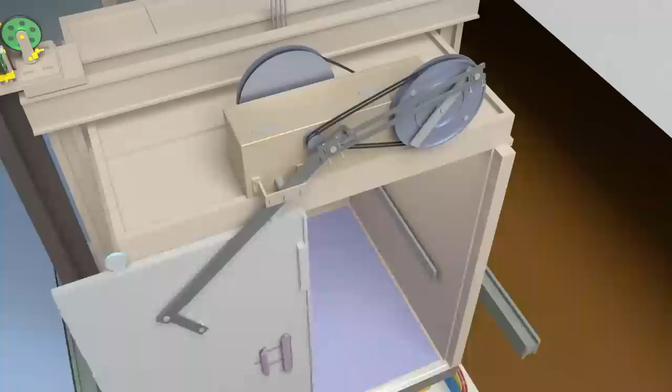Elevators revolutionize the way we build and live in our cities. In this video, we'll be exploring the different parts of an elevator, how it works, and then the safety mechanisms which protect us as we ride these amazing machines.

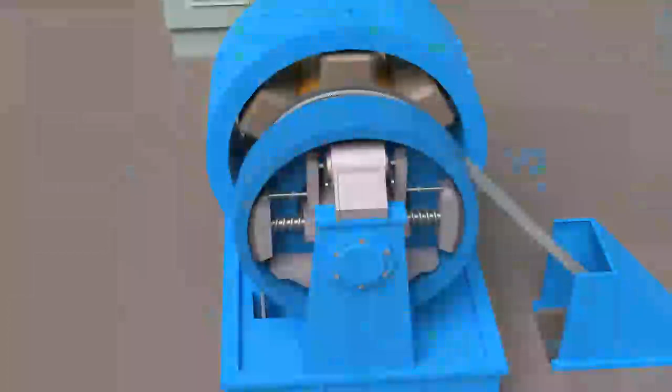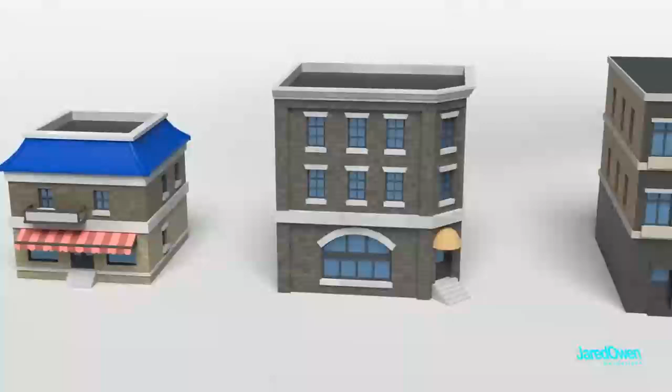In the 1800s, architects and engineers were pushing the boundaries of how high we could build. As these buildings increased in height, there was somewhat of a limit. It was hard to utilize the upper floors because you had to walk up a lot of stairs, and no one really wanted to do that every day. The reason we started to build higher is because of elevators. In many parts of the world, it is referred to as a lift, but in this video, I'll use the word elevator.

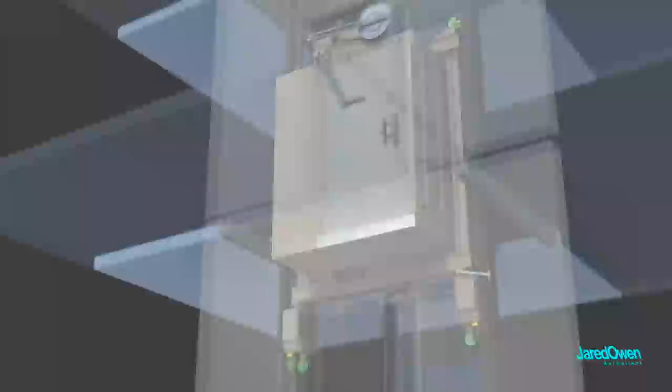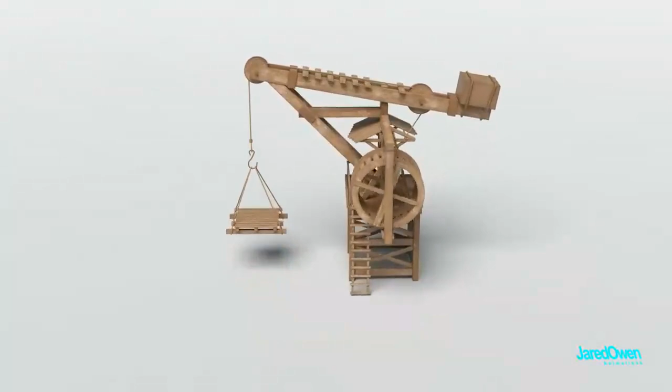The elevator is not a recent invention. The idea of using a machine to lift things in the air, this is not a new idea. It can be traced back to ancient civilizations over 2,000 years ago. Various lifting devices such as hoists or cranes, these have been used in various places like factories and construction sites. But lifting people, that usually wasn't done. If that rope snaps, there is nothing stopping you from falling to the ground. In the early 1850s, Elisha Otis invented a safety mechanism that changed everything. Let's take a look.

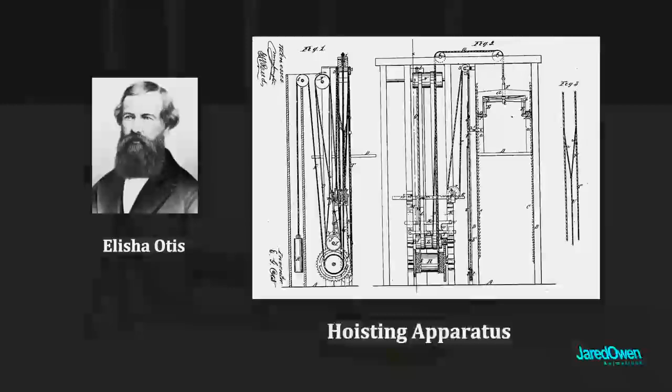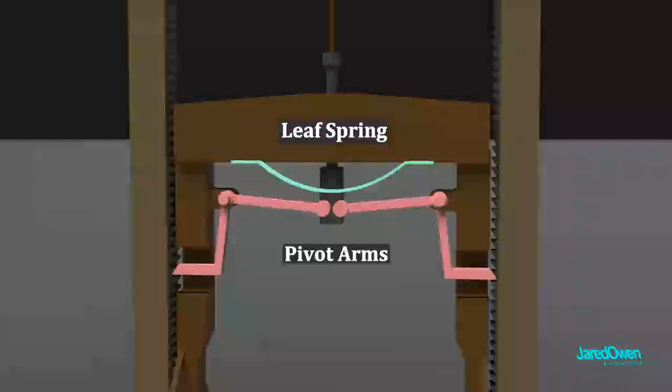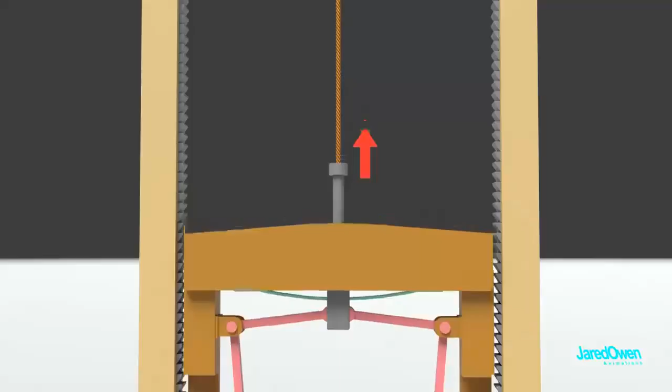This is a simple lift that can be raised or lowered by the rope. The safety mechanism is made up of a leaf spring, 2 pivot arms, and the teeth on both sides. When the lift is being pulled upward, the pivot arms are retracted, allowing the elevator to rise. But if the rope suddenly loses tension for any reason, the leaf spring immediately pushes the pivot arms down, which then come in contact with the metal teeth. This stops the elevator from falling to the ground.

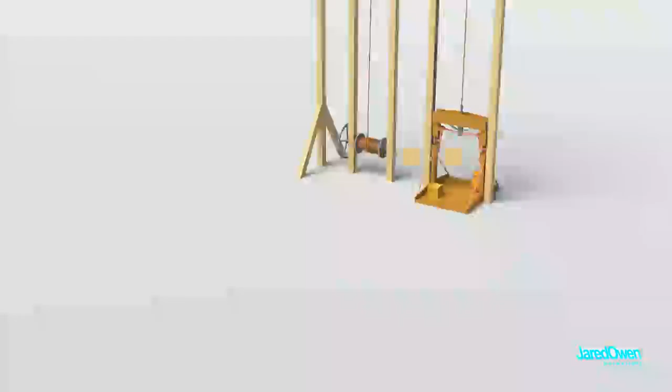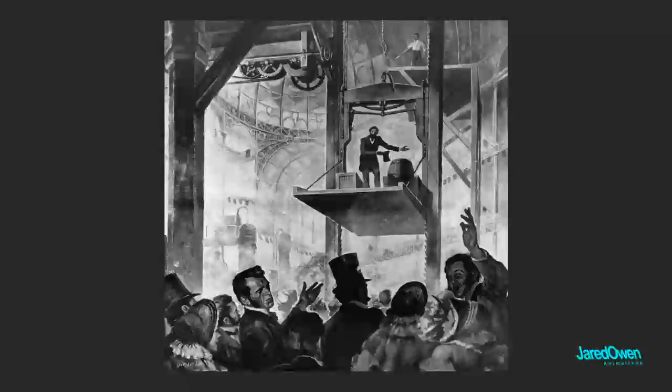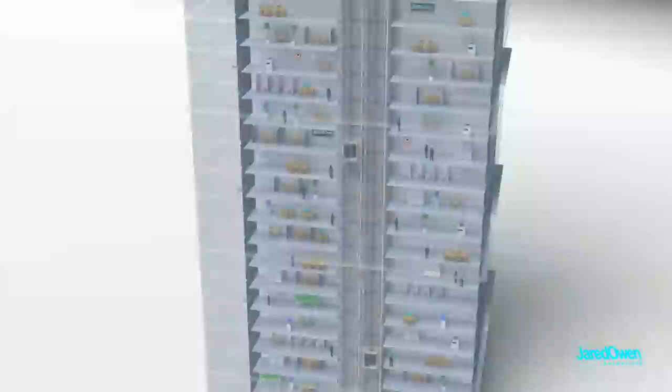Mr. Otis was so sure of his invention that he demonstrated it to a crowd of people at the World's Fair. He lifted himself up on the elevator and then had someone cut the supporting rope above. He only fell a few centimeters. This demonstration convinced the public that elevators could be safe enough for people to ride. Elevators today have multiple safety mechanisms in place, but it all started with Elisha Otis. Over the coming decades, elevator shafts became the core of most buildings. This allowed for skyscrapers to reach new heights and for the buildings to be fully utilized.

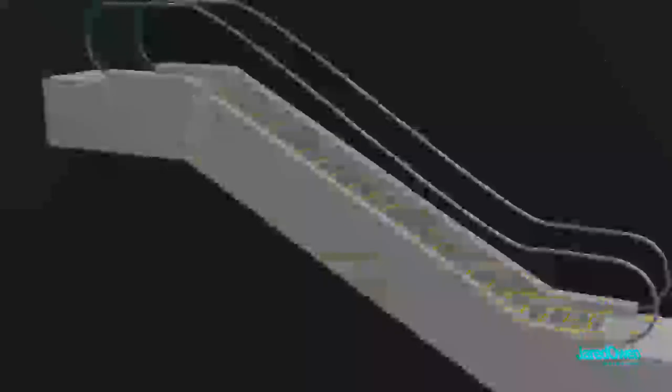And of course, we have to mention the revolving stairs, or more commonly known today, the escalator. Helpful for moving large amounts of people, but only up a few floors. Once those buildings get really tall, the best solution? The elevator.

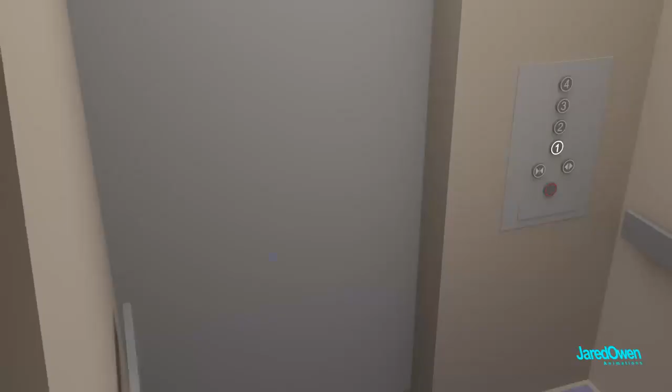Ah, that music. But for this video, we'll pick up the pace just a little bit.

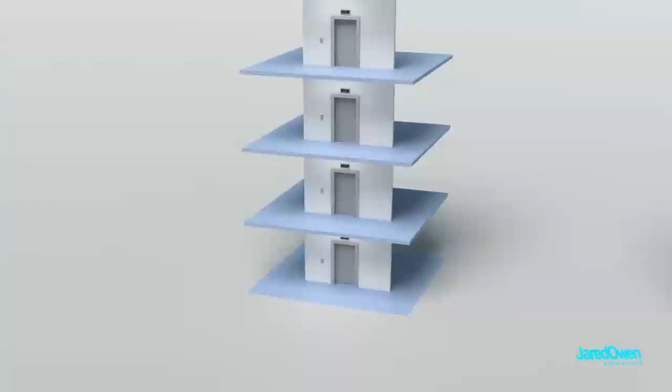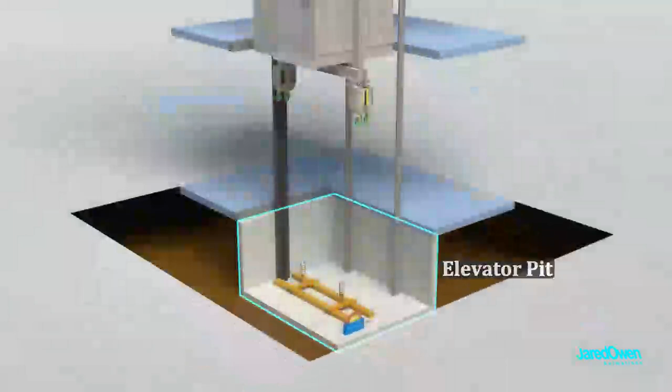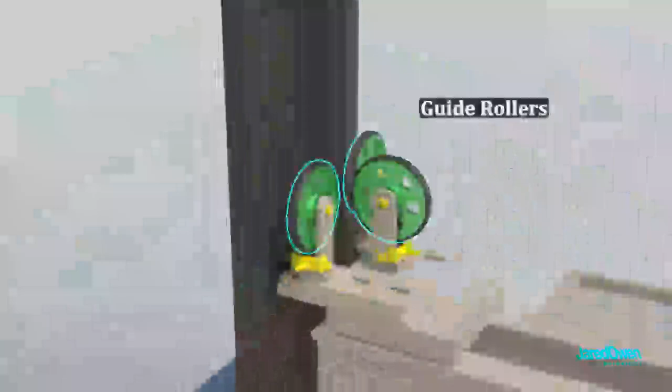Let's go over some basic parts of the elevator. Now, there's a lot of different elevator companies and different ways to make elevators. Some of the mechanisms and names will be slightly different depending on the elevator. So keep that in mind. This is called the shaft or the hoistway. The elevator pit at the very bottom. Then we have the cab, which moves up or down inside the shaft. And these are the guide rails. The cab usually has guide rollers to move it along the rails.

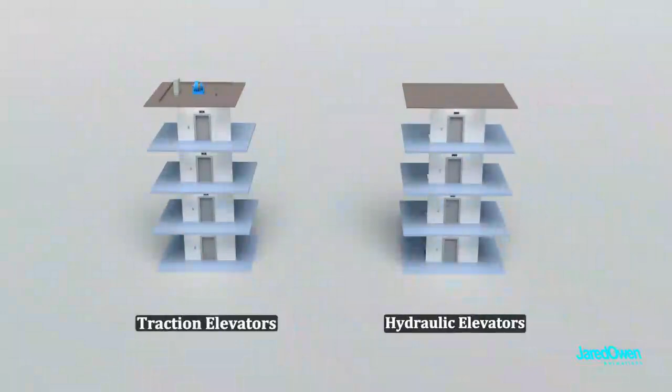There are 2 main types of elevators, hydraulic elevators and traction elevators. In real simple terms, traction elevators lift the cab from above using cables, and the hydraulic elevators push the cab up from underneath. For most of this video, we're going to look at traction elevators. These are the ones you'll find in really tall skyscrapers. But first, let's at least get the basics of the hydraulic elevator.

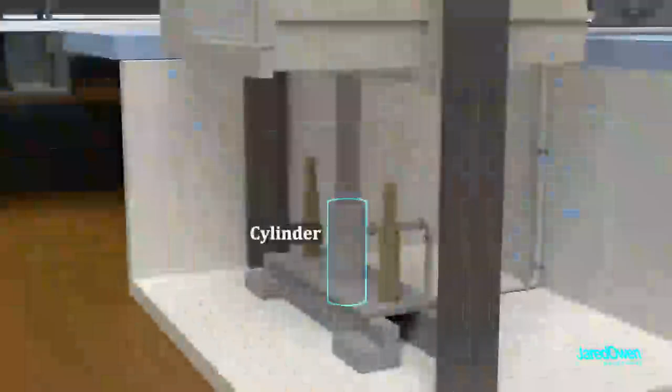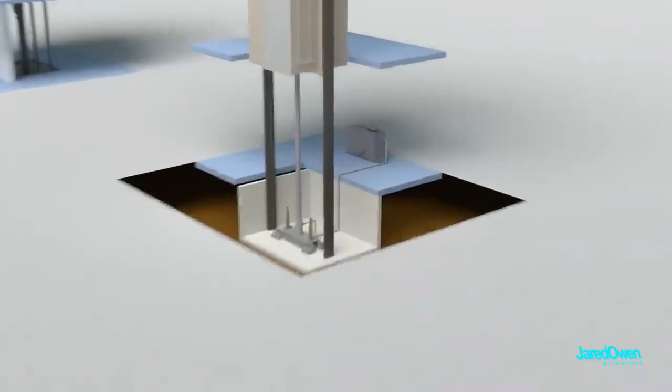This uses a cylinder and a piston. These usually extend several floors beneath the ground, so there's enough length to push the elevator up. Close by, you'll find a machine room with a pump unit filled with oil. When the elevator needs to go up, the oil is pumped through the pipes and into the cylinder. The pressure pushes the piston up, which raises the elevator into the air. You'll find hydraulic elevators in smaller buildings, usually not more than 6 stories tall. This is due to the length of the cylinder and the pressure involved to push the piston up.

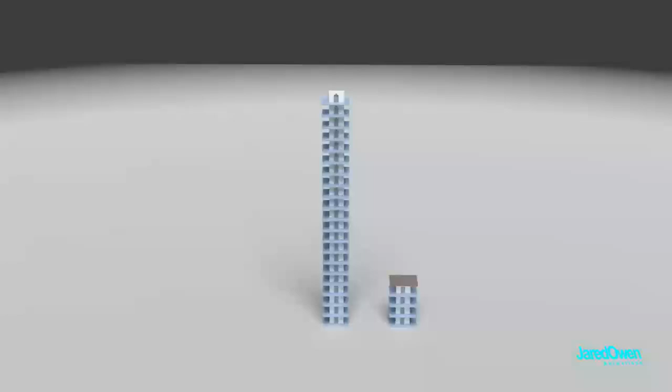Okay, traction elevators. Are you ready? Traction elevators are most common in taller buildings. In some places in the world, these elevators can service more than 100 floors. Let's not get too carried away though. I'm going to demonstrate this with just 4 floors. We'll keep things simple. At the very top is the machine room. This is where you'll find the electric motor.

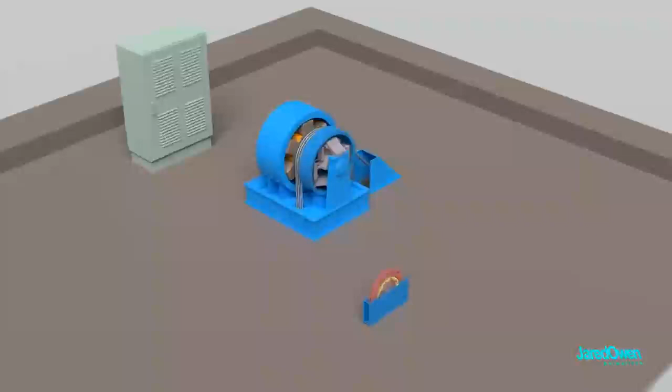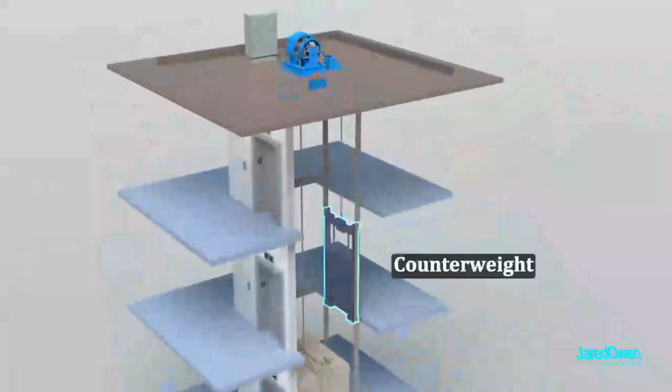The motor pulls the cables by turning the sheave, which is basically a special kind of pulley. On one side, the cables go down and attach to the cab, and on the other side, they attach to the counterweight. The counterweight moves opposite to the elevator cab. So why do we have this counterweight? Without the counterweight, the motor would have an enormous amount of tension on only one side. It would have to work a lot harder to lift or lower the cab.

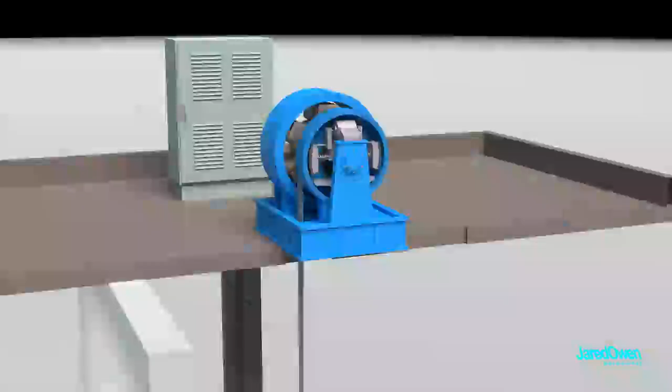The counterweight makes it so that there is less strain on the motor. All it has to do is tip the balance so the elevator moves up or down. The counterweight will weigh as much as the cab when it's about halfway filled up. Ideally, the system will work best if it's perfectly balanced, but this won't always be the case. The weight of the elevator cab will frequently change.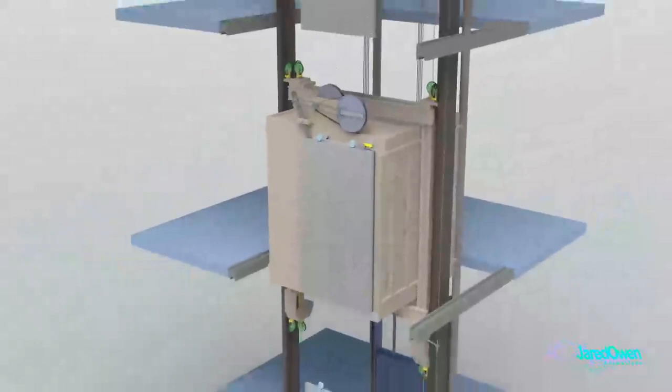This is the controller box. It's like the brains of the elevator, safely moving it up and down. Not all traction elevators are going to have a dedicated machine room. They're able to fit the motor and other components at the very top of the elevator shaft. They refer to this as a machine roomless elevator, or MRL. We won't go into detail about these, but I at least want to mention them so you know that they exist. Elevators have many safety features built in to protect the passengers riding in the cab.

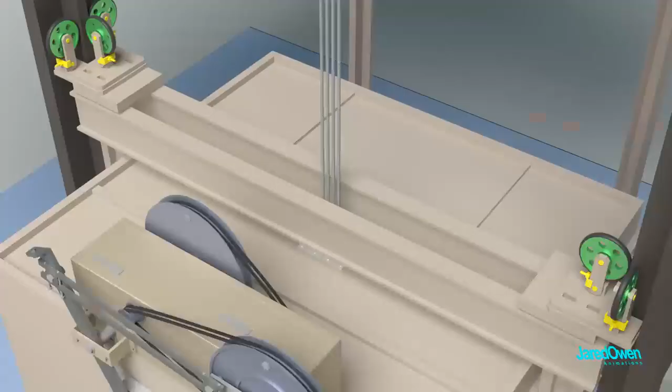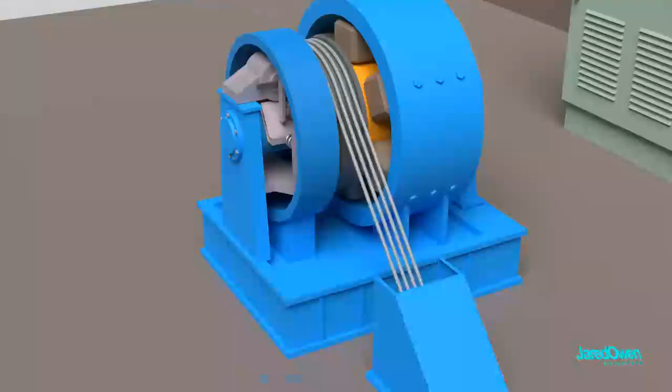First, you have the machine brake. This is used to stop the spinning of the motor and hold the cab steady. There are usually at least 4 cables holding up the cab, sometimes as many as 8 cables. Each of these cables is strong enough to hold the weight of a fully loaded elevator. The likelihood of all of these cables snapping is very small, but if it did happen, you would still be safe. Let me show you.

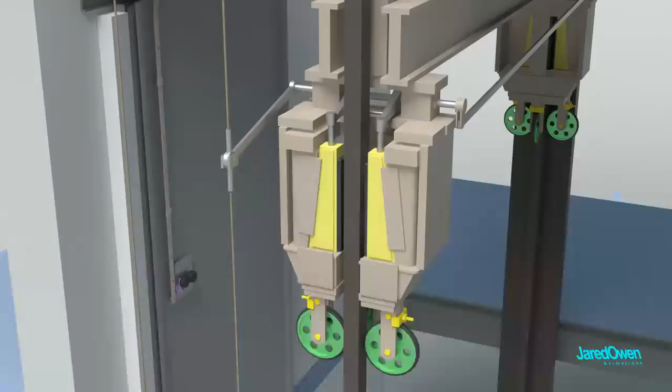Do you remember Mr. Otis's safety mechanism at the beginning of this video? The modern version of this is a little different, but the main idea is still the same. At the bottom of the elevator cab is the emergency brake. There are 2 clamps, and these are located on both sides of the guide rail. Normally they don't touch, so the elevator is allowed to move up and down. But if the lever is pulled, then they move in and grip the guide rail, which stops the elevator from falling. The lever is connected to a cable, and this is a separate cable from the ones that lift the cab. This cable attaches to another wheel at the top.

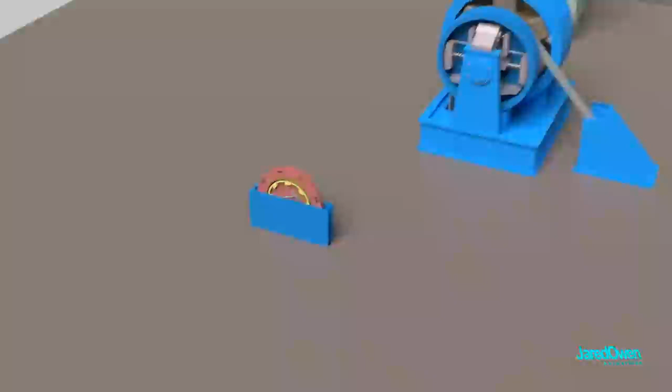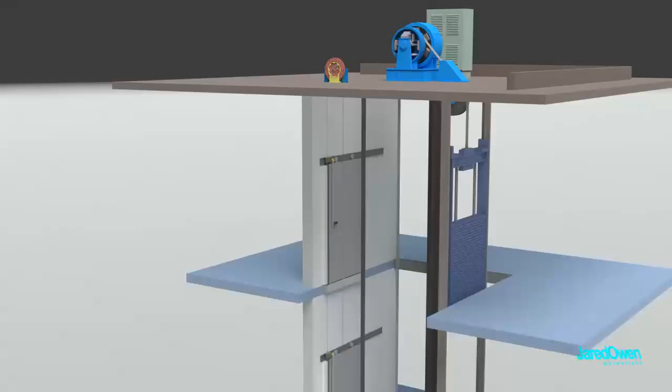Let's take a look. Back up here in the machine room, this device is called the overspeed governor. Normally, this spins along with the elevator cab as it moves up and down. Inside is a mechanism with 2 flyweights. Let's say, for whatever reason, that the cab starts to move downward too quickly. The overspeed governor will spin faster. If it spins too fast, these flyweights will move outward and catch the gear teeth on the side. This will stop the spinning, which stops the cable, and the weight of the cab now causes the lever to go up. And there's clamps on both sides of the elevator which firmly hold it in place.

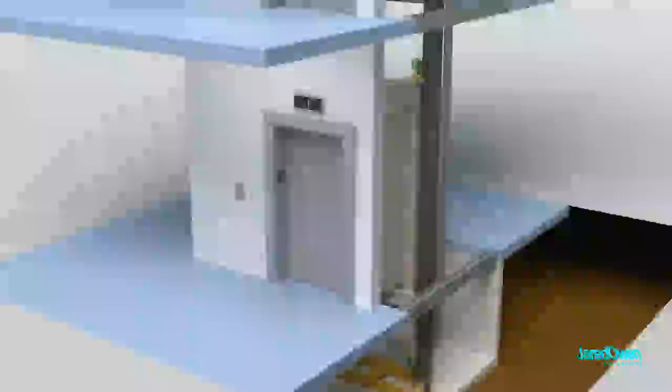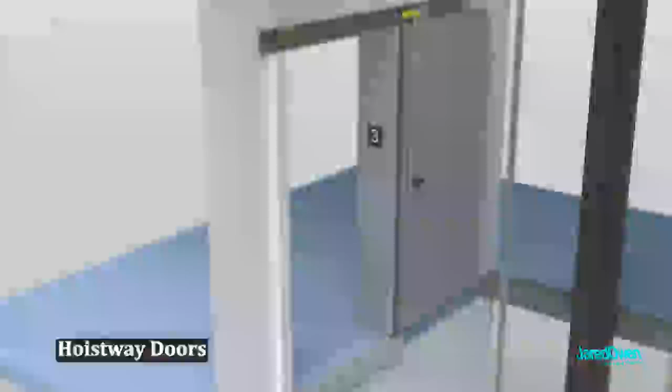Now, if you do happen to get stuck in an elevator, don't try and force the door and climb out. Press the emergency call button to get connected with someone who can send help. Let's talk about that door mechanism. There are essentially 2 doors on an elevator. On each floor, you'll find a door. These are usually called the hoistway doors. And then on the elevator cab itself, you'll find the cab door. So when these are together, we have the cab door and the hoistway door.

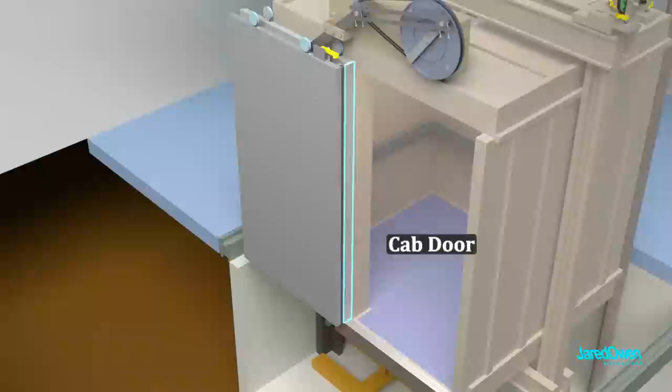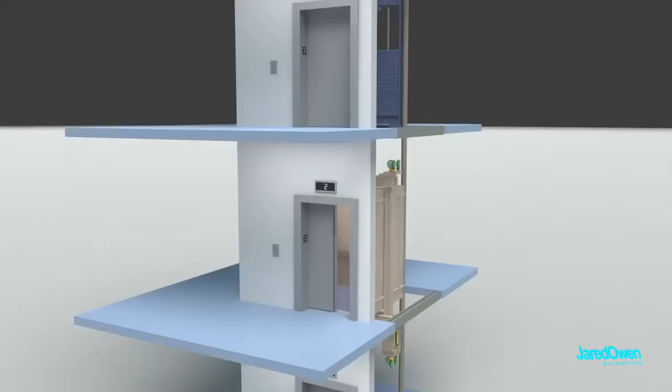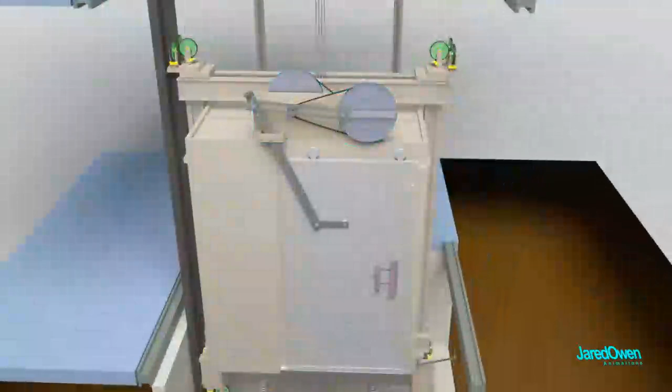We don't want either door to open unless the cab has come to a complete stop at the correct floor. These doors also have sensors so they won't close if something is in the way, and the elevator won't start moving until the doors are completely closed. Let's look at just the cab for a minute. The door operator is located at the top. This turns some gears, which pulls on the lever, which slides the door open. Notice how each of the hoistway doors does not have a way to open by themselves. The doors can only be opened by the door operator on top of the cab. When this opens, it will pull the hoistway door with it.

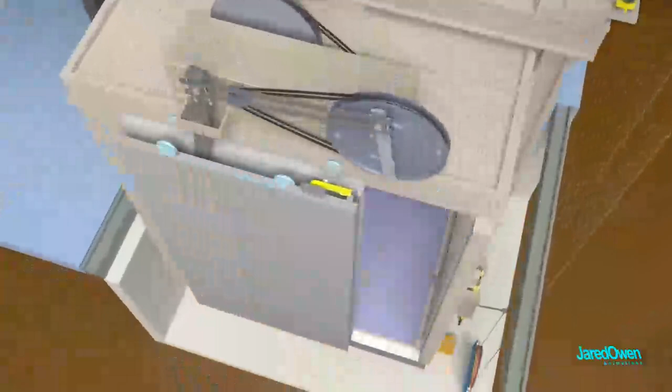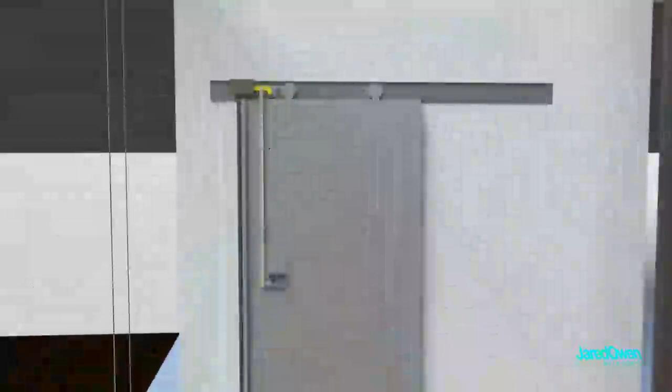Each of the hoistway doors has an interlock. This ensures that it won't open until the cab is right behind it. Let's look at the mechanism. Each hoistway door has a beak. When this is down, the door won't open. Push up on this bar and the beak goes up. This allows the door to open. Down below, you'll find two black pickup rollers. Push the one on the left and it rotates, which pushes up on the bar, which unlocks the door.

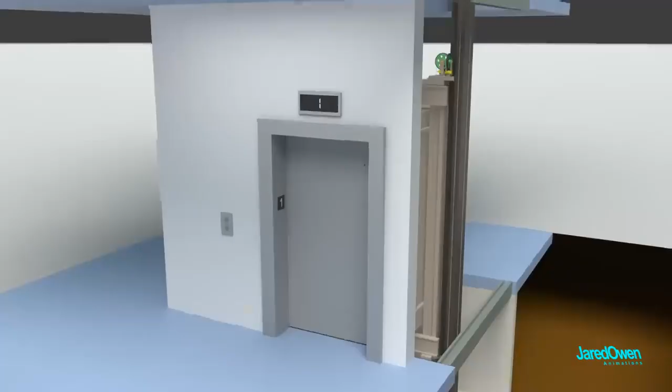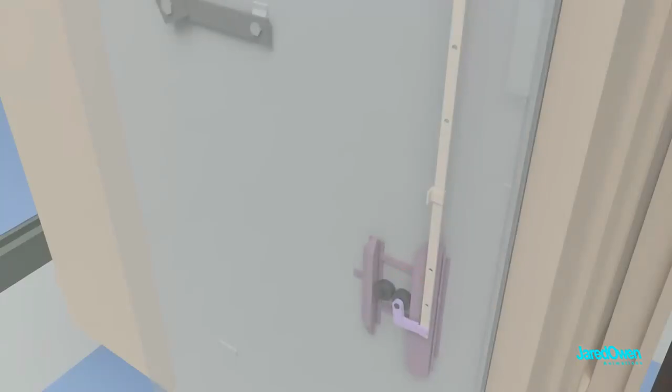So how does this get unlocked then? Well, I'm glad you asked. On the cab door, there's a piece called the clutch. As the cab moves up and down, the clutch moves right around the rollers. When the cab stops, the cab door will open. The clutch will push on the pickup roller, which will unlock the mechanism. Both doors can now slide open together.

In a rescue situation, or maybe even for maintenance, the workers can use a special key to unlock the door even if the cab isn't right behind it. Now, a key like this should only be used by authorized personnel who have a good reason to be opening the door. And of course, be safe around elevators. Please don't be fooling around, be responsible, and use these machines as they are intended to be used.